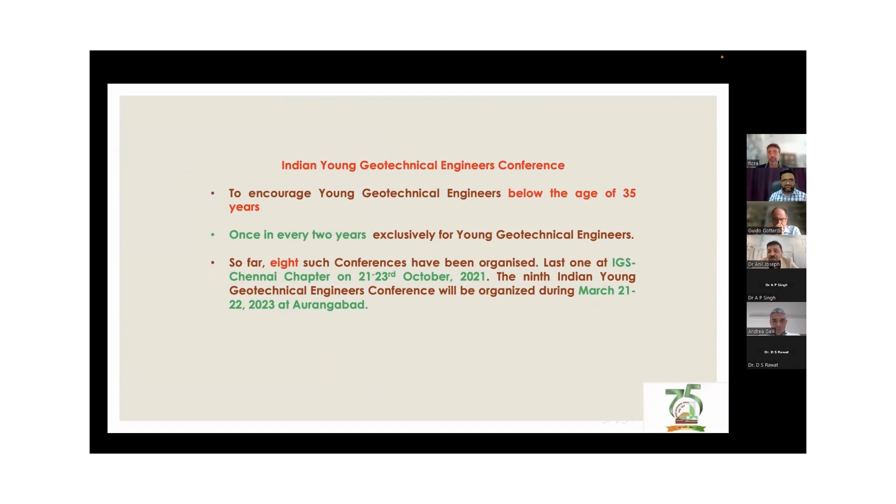These are the objectives, which I don't want to go into, but we promote conferences, seminars, symposia, workshops, webinars, and annual general meetings, and also give the best local chapter award. We also insist on promoting a lot of young geotechnical engineers, people below 35 years of age, because we believe the future is in them, and they are going to make the difference.

We also have a journal, the Indian Geotechnical Journal, now in its 52nd year, and also the IGS newsletter, published quarterly. A lot of awards are given to promote engineers: 37 best paper awards and 15 best papers for young engineers. A lot of industry awards are also given to bring industry and academia close together, so that it improves the interaction, which is very much essential, especially in the case of heritage structures.

And we have a vibrant web portal, and you can go in, and all these lectures will also be uploaded into our web portal as well, so that people can get more knowledge. We also give students practice software programs so that they can improve upon them. India is quite active in this.

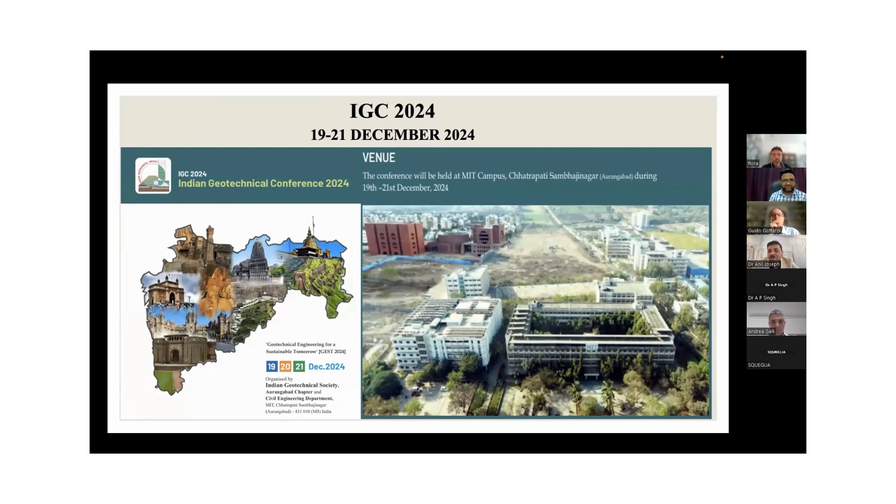I just wanted to mention 2 major events coming up for us, 3 events in fact. From 19 to 21 December 2024, we have the Indian Geotechnical Conference coming at Aurangabad. I look forward to people joining that. These are the important dates for that.

And we have the first GeotechAsia coming up at Taj Exotica, Goa. I want Alessandro Flora and Professor Guido to join us in this mega conference, which is similar to the Asian Regional Conference, promoted by India. It will be in the beautiful tourist city of India called Goa. So definitely look forward to meeting you people. It's in collaboration with IIT Bombay.

And also we have the 12th ISSMGE field monitoring in geomechanics conference coming up in 2026, which will be held at IIT Indore, organized by Professor Nilima Satyam, who is very active in our society.

So we have tie-ups with other societies. We keep on networking and have made tie-ups with many companies and many countries like United States of America, Brazil, Nepal, Sri Lanka, Japan, Korea, and other countries.

So this is all from me regarding the Indian Geotechnical Society. I would like to once again congratulate the organizers for coming up with this, and look forward to listening to Professor Guido regarding the preservation of historical towers. And over to you.

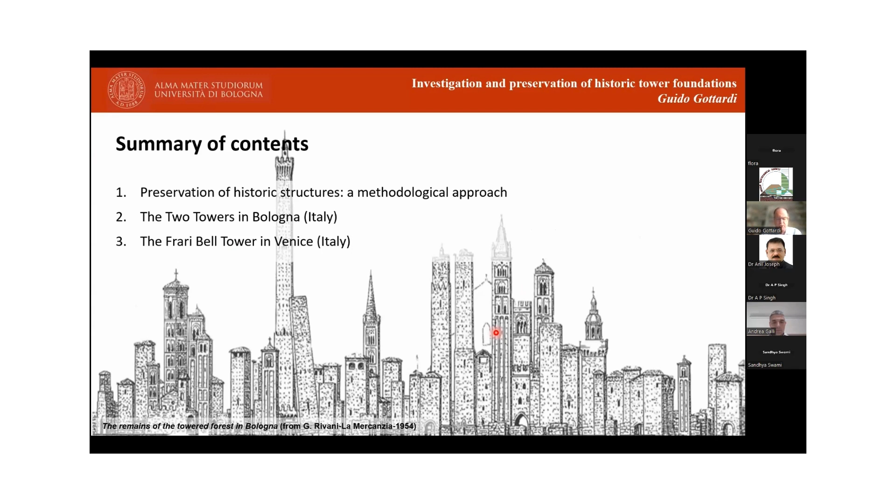I will then try to demonstrate these principles by showing a couple of well-documented case histories in which I happen to be involved. They are located in two Italian cities, Bologna and Venice, where I had the fortune to grow up and live. Both cities are well known for the past presence of a very high number of towers, mainly civic towers in Bologna and bell towers in Venice.

Our technical committee knows very well that for such a complex topic, it is not possible to provide prescriptions of general validity. But the TC rather aims at collecting a number of instructive examples that could be used as a source of inspiration for geotechnical engineers. So really a sort of methodological approach.

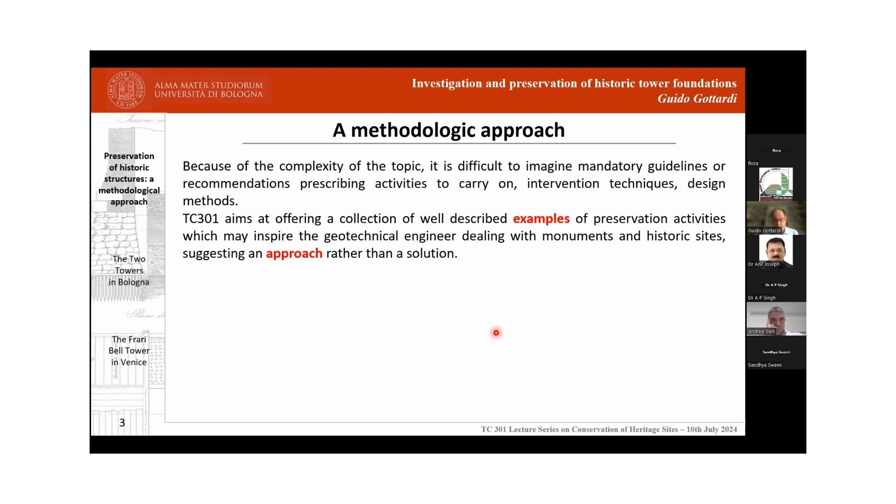And this is exactly what I mean to do here with you today. Now, I am sure we are all aware of the international guidelines on existing structures and their Annex I that points out the importance of preserving authenticity and integrity of heritage structures, in particular of foundations, that are not different from the rest of the structure as character-defining elements.

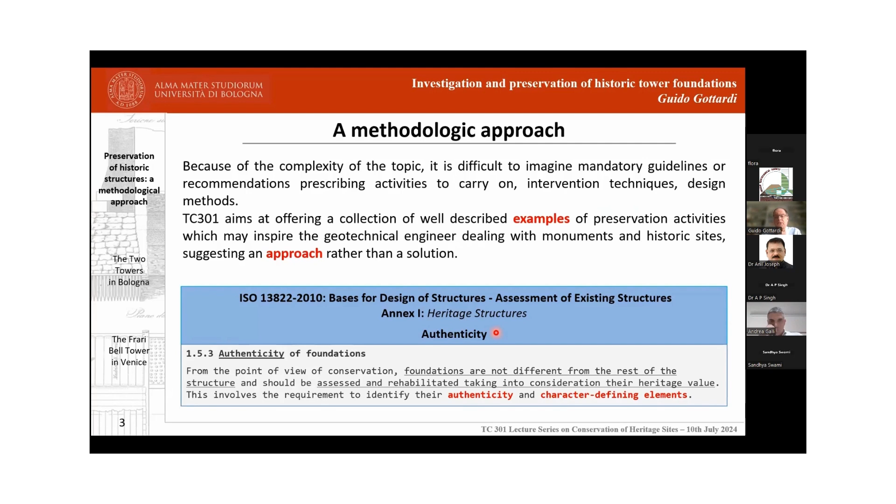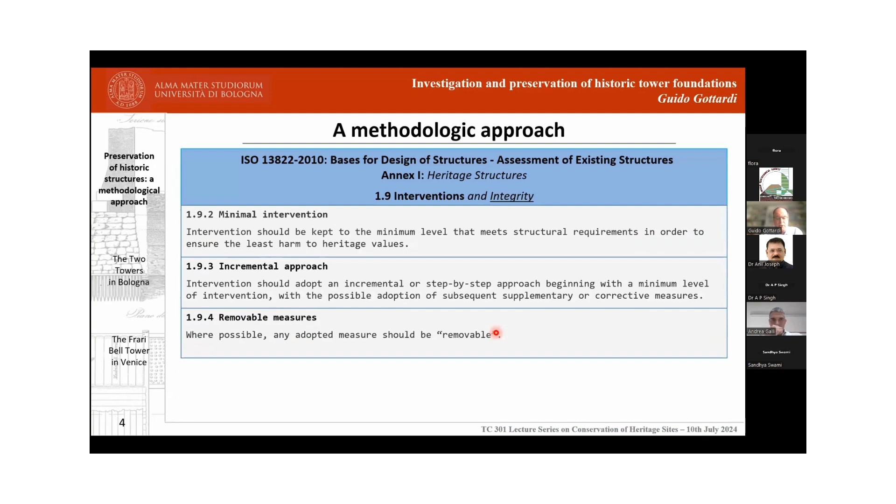And when dealing with possible interventions and remedial measures, preserving integrity requires minimal intervention, an incremental approach, and possibly removable measures.

Now, we all know how the concept of preservation and even the definition of authenticity can be seen and interpreted in different ways around the world according to different cultural contexts. And I believe that one of the main tasks of our TC is exactly to offer a forum of discussion and debate to our geotechnical community on all such critical issues.

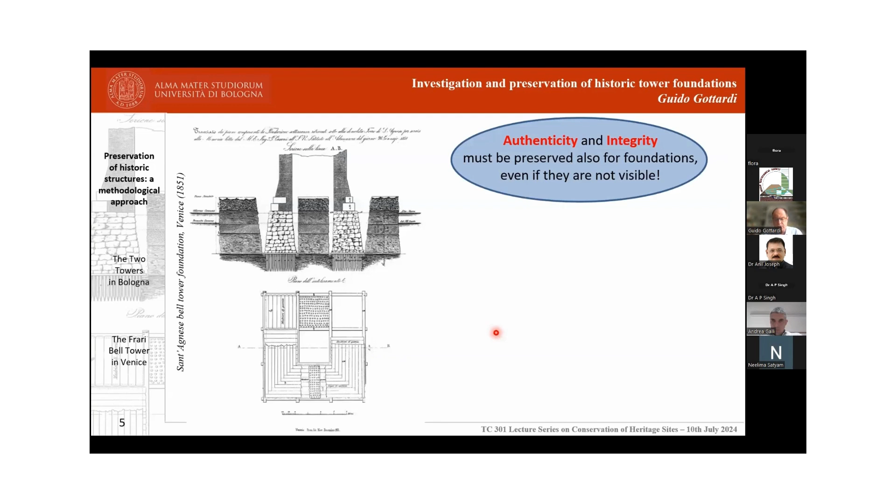Now, no doubt, preservation is an interdisciplinary activity, as already mentioned, and requires the contribution and competencies of many experts who should refer to and talk to each other. Among these, geotechnical engineers must also play a decisive role, I think, even if this is not always the case. It is self-evident that, even if they are not visible, foundations and the supporting soil are parts of a unique, comprehensive system for which authenticity and integrity must be preserved.

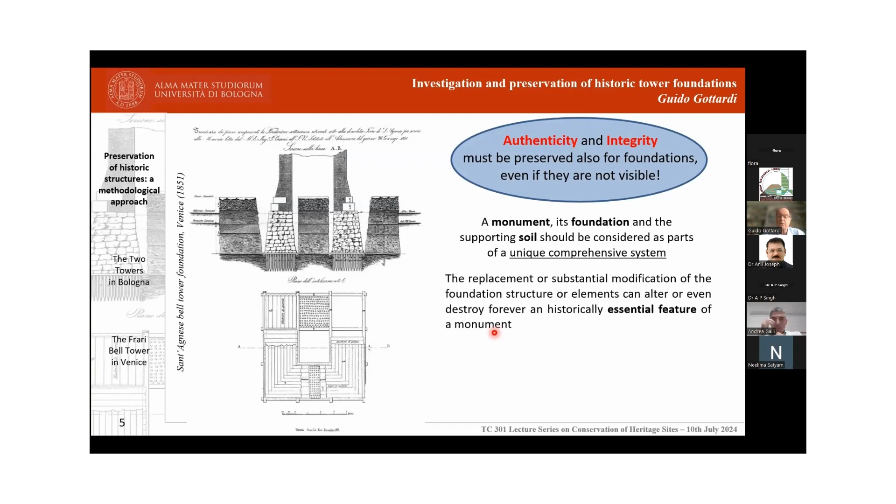The replacement of or substantial modification of the foundation structure or elements can alter or even destroy forever an historically essential feature of a monument. And towers in particular, I think, are structures whose behavior mainly relies on their interaction with soil, and therefore the solution to their possible problems could be found exactly there.

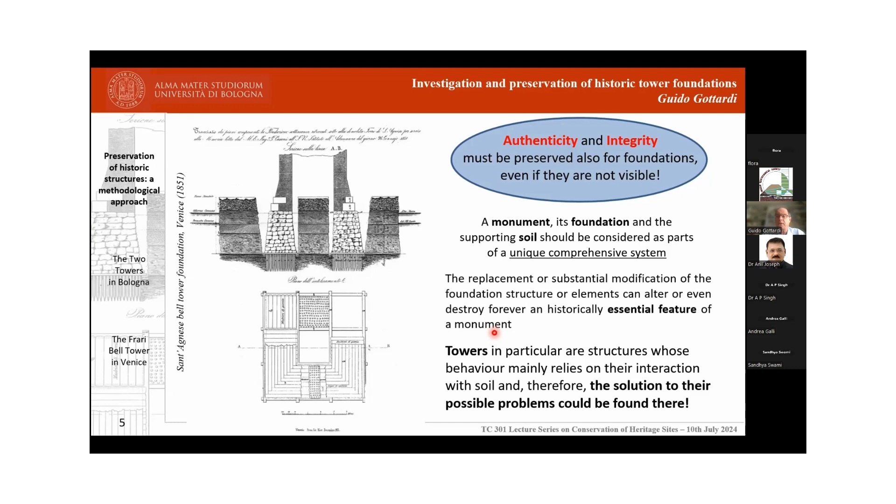Now, talking about towers, I cannot but mention the most famous example of a respectful approach: the soil extraction intervention carried out for the Leaning Tower of Pisa, only after many years of studies and investigations, and having taken into consideration several options, following a careful step-by-step procedure and achieving the final successful result, as our good friend Professor Carlo Viggiani likes to say, without touching it.

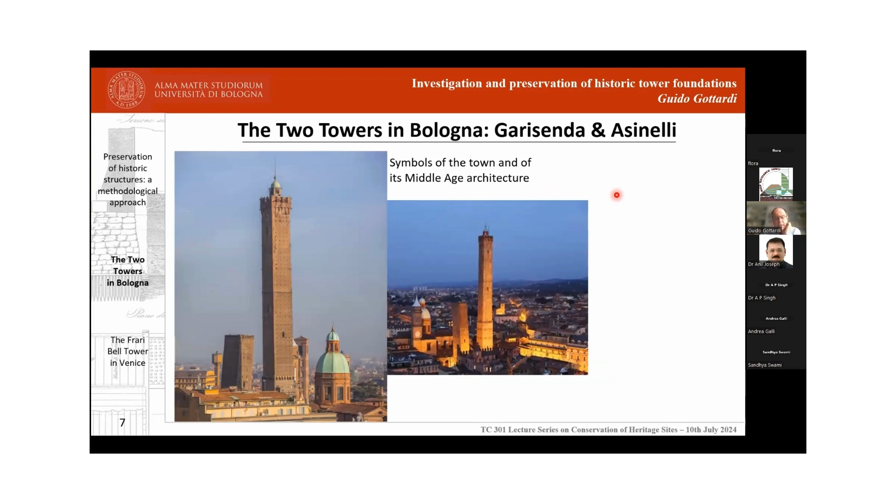Later on, I will present a less known case that followed a very similar approach. But let's start from the two towers in Bologna. Garisenda and Asinelli are the true symbol of the town and of its Middle Age architecture. Located one close to the other, in the very heart of the city center, they are among the few remains of a past when tens of towers used to populate and make characteristic the skyline of Bologna.

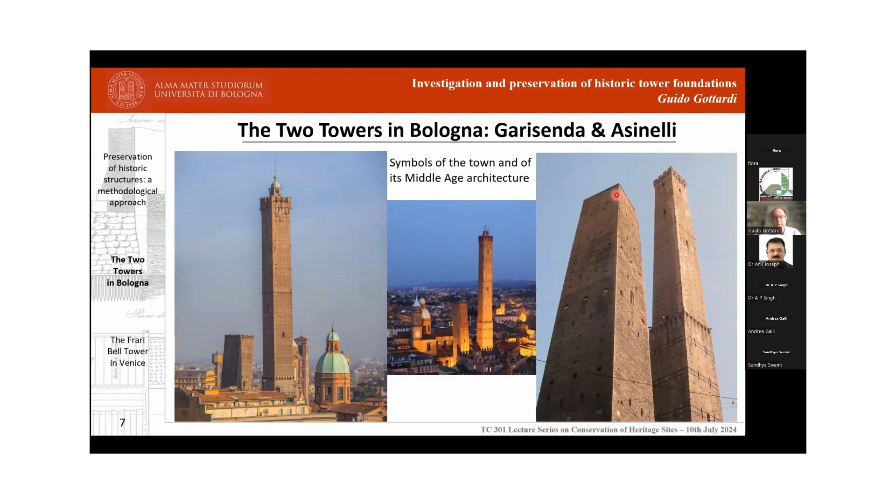Here you can see the main figures of the two towers. Garisenda, the shorter one, was constructed first towards the end of the 11th century with thick rubble masonry walls and a height that was originally 60 meters, but was soon reduced to slightly more than 48, the current height, because of its significant leaning that most probably started soon after its construction.

Its current inclination towards southeast is quite impressive, and this generates an important overturning moment onto its foundations with serious critical implications on its long-term stability. At the right bottom end of the slide, you can see with a black arrow the main direction of the inclination, both of Garisenda and of Asinelli, which is almost opposite to it.

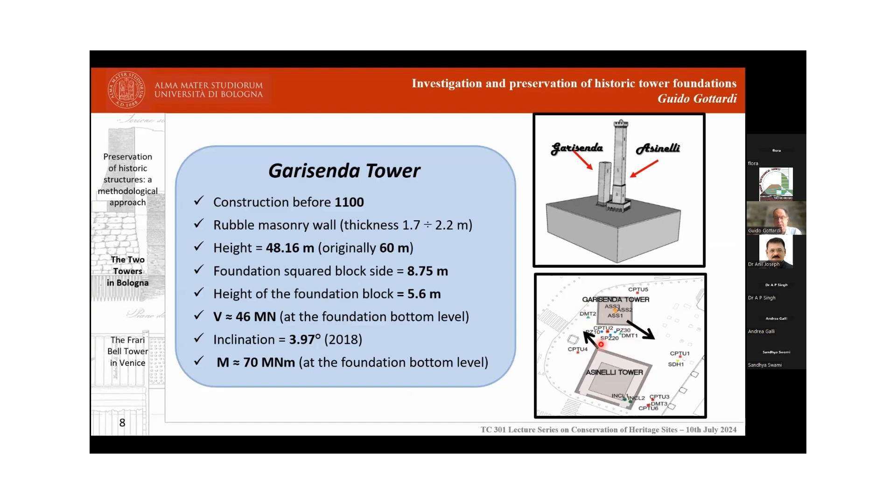Fortunately, the Asinelli has got a much smaller inclination, but it is twice as tall, making it the tallest and most slender original medieval tower in Italy. It was constructed soon after the Garisenda with larger foundations and thicker walls, probably after having learned the relevant lesson from the adjacent Garisenda.

If we look at the historical sequence of events concerning the two towers, one can see that while the Asinelli was raised up to more or less its current height of 100 meters, the Garisenda height was reduced by 12 meters, as mentioned, even though the initial idea, because of its inclination, was to demolish it completely.

The two towers are located right in the city center, so many events occurred over the past centuries, with lots of constructions, craftsmen's workshops, and even a small church built in the area around the towers. All these structures were demolished at the end of the 19th century.

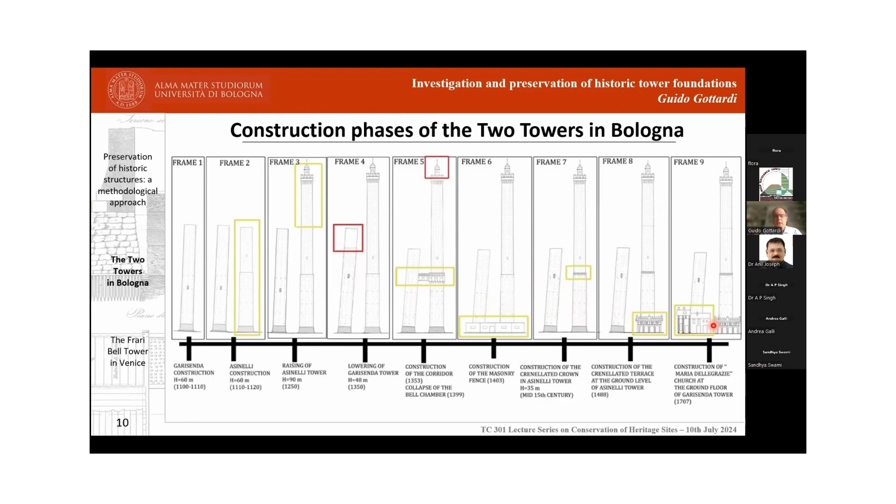It might be interesting to know that the construction method of a medieval tower remained substantially unchanged until the beginning of the last century. The main body of the foundation was essentially made of a conglomerate block cast in place, directly laying on the virgin soil, or sometimes on wooden piles.

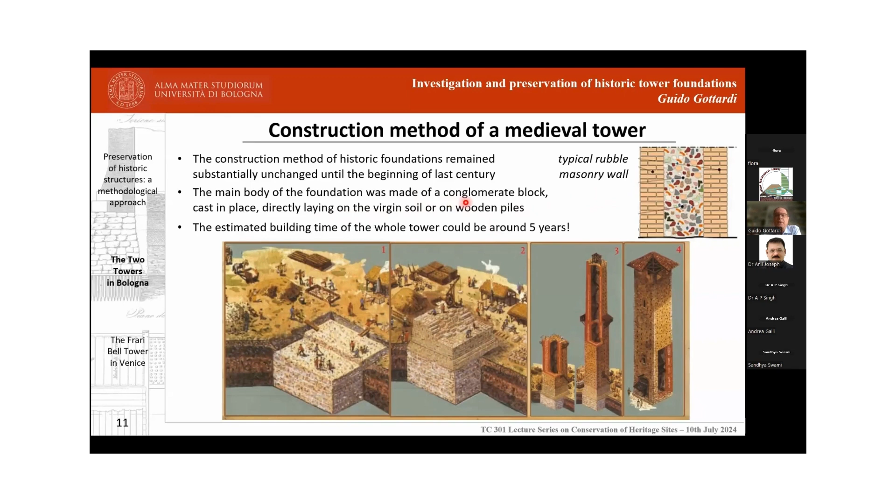The structure of the tower was made of typical rubble masonry walls, with gravel and bricks with lime mortar inside, and an external coating of masonry bricks. The estimated building time for the whole tower could be around 5 years, which I think is quite impressive from the historical documents.

Another aspect to know is the geological setting. The historical center of Bologna is located in the Po Valley at the northern foothills of the Apennines, and its elevated position corresponds to the interfluvial area between the rivers Savena, on the right-hand side, and Reno, on the left-hand side. There are other small rivers and creeks flowing into the city center, and the subsoil of the Bologna city center is mainly alluvial deposits of the Pleistocene era.

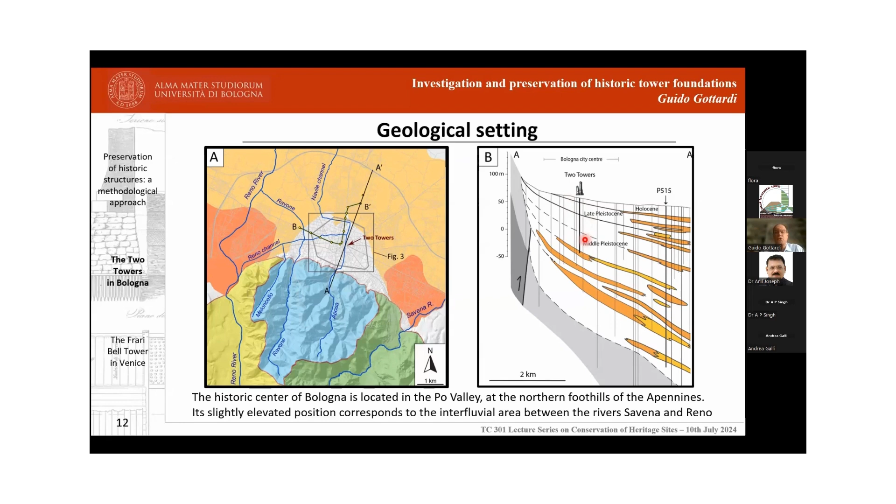As you can see, for about 100 meters below the two towers' position, you have essentially fine-grained soils. This was also found through several geotechnical investigation campaigns carried out over the last decades by the different committees called upon to look after the towers.

The final geotechnical investigation was carried out in 2016, and it was made up of corings, downhole tests, dilatometer tests, and some geotechnical monitoring like piezometers and seismometers. From these investigations, as well as previous ones, an important feature could be reconstructed: how the foundation of the Garisenda Tower is made.

We know very little about these towers from old documents, so we don't even know how they are made, what the material is, or what the geometry is. Starting from the bottom to the top, we find a foundation block made of conglomerate and lime mortar as well, then a basement made of selenite stones.

Selenite is a local gypsum rock much used locally in Bologna for many historic buildings. The basement of the tower is made with external walls in selenite stones, but an internal mixture of lime mortar, river gravel, and shards of bricks, what we call the rubble conglomerate. We can find this also on top of the structure, where instead of selenite stones, you have masonry bricks.

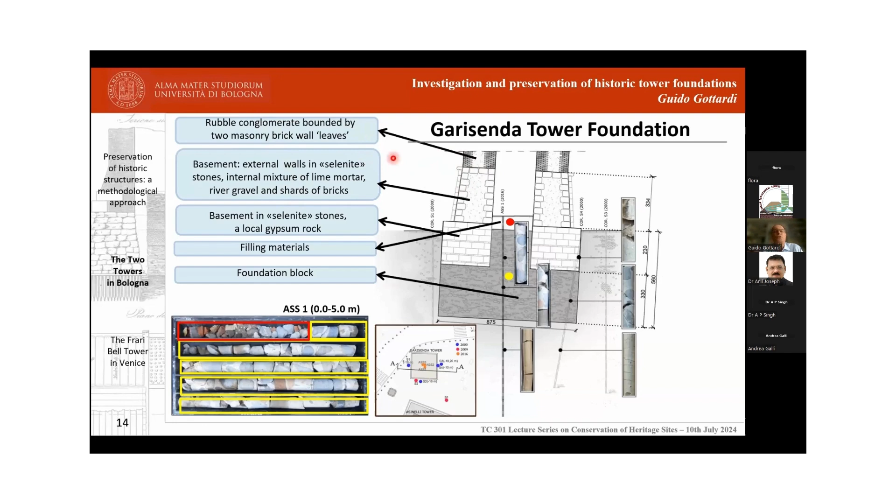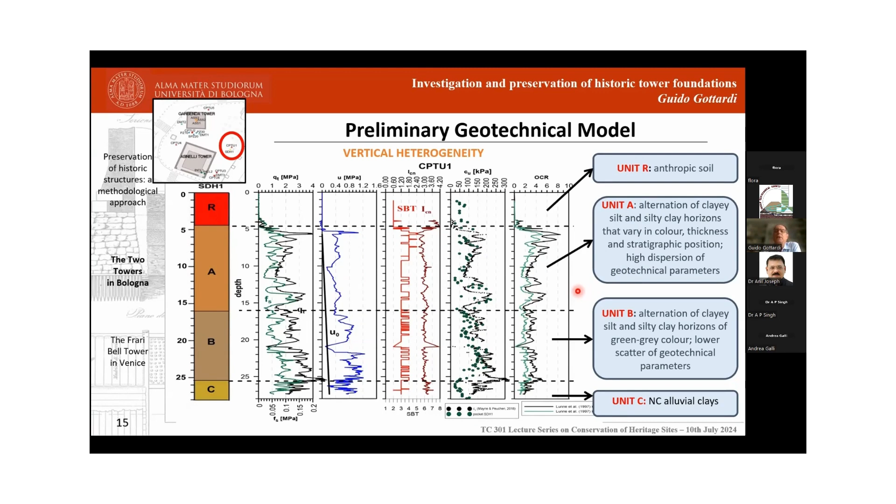In the attempt to get a refined geotechnical model to reduce the uncertainty and dispersion of those parameters, we tried to look into these alluvial deposits, which by their nature show typical lenticular geometries with very poor lateral extent, and are locally interrupted by paleosols.

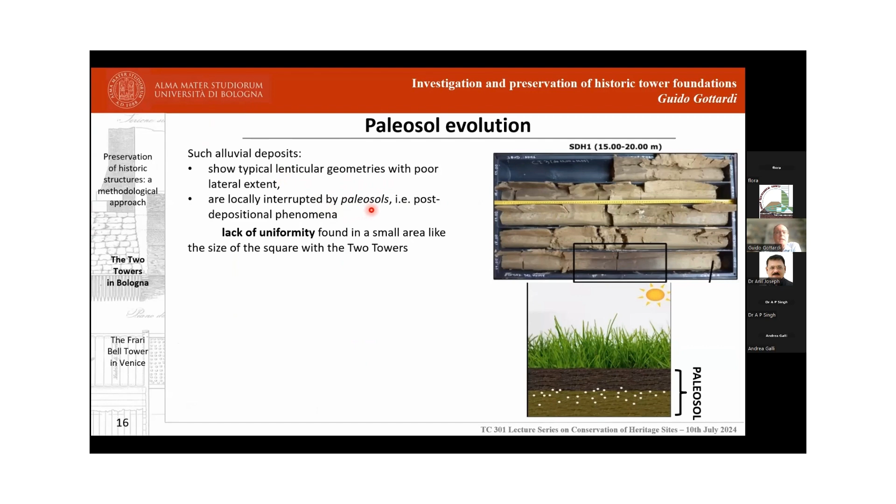What are paleosols? Paleosols are post-depositional phenomena that typically develop during a long period of subaerial exposure of topsoil. So you can find over time this sequence of horizons, Ab, Bk, and Bw, with a different degree of pedogenesis. This is the reason for an important lack of uniformity, both vertically and horizontally, found in a small area, just the size of the square with the two towers.

Now, I won't go into the details of this very articulated model, but we could actually reconstruct the different layers, ascribing them to their history, and so much reducing the uncertainty of their geotechnical parameters. So in this way, also the stratigraphy of the local subsoil could be reconstructed in a very detailed and reliable way.

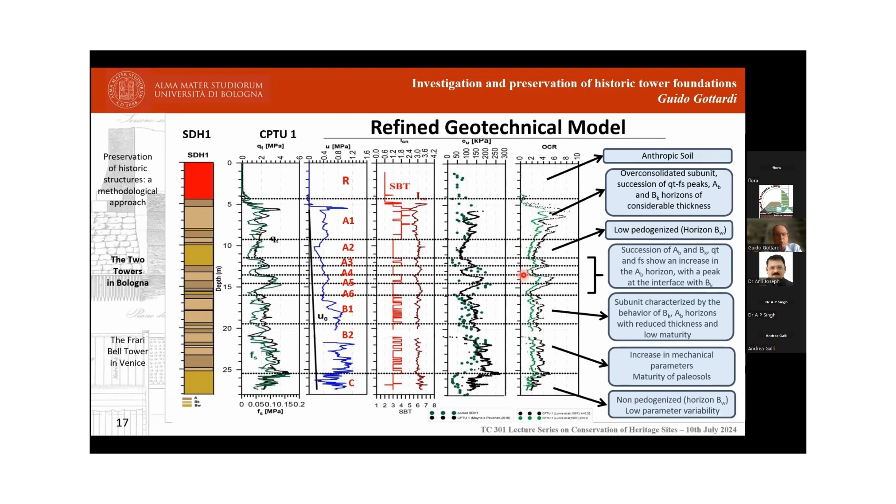That was more or less estimated between 1 meter and 1.5 meters as total settlement of the two towers.

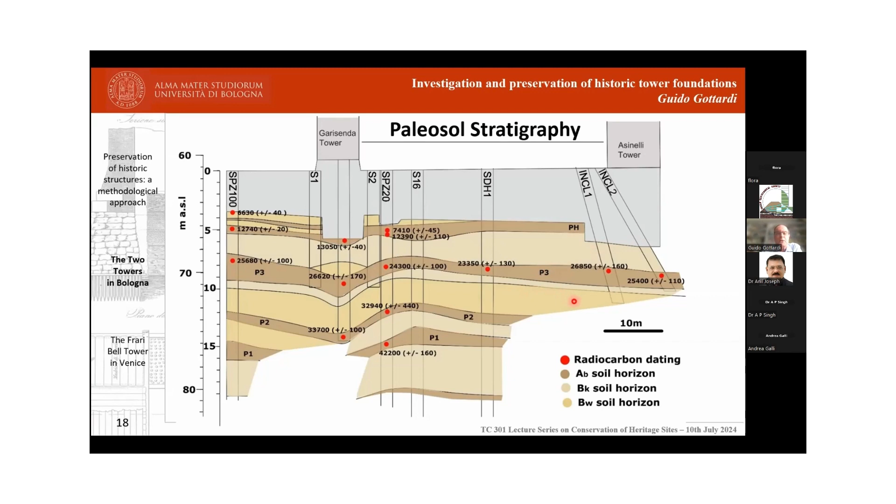Of course, this is only an assumption, difficult to demonstrate, but this is consistent with the fact that the tower started to lean soon after its construction.

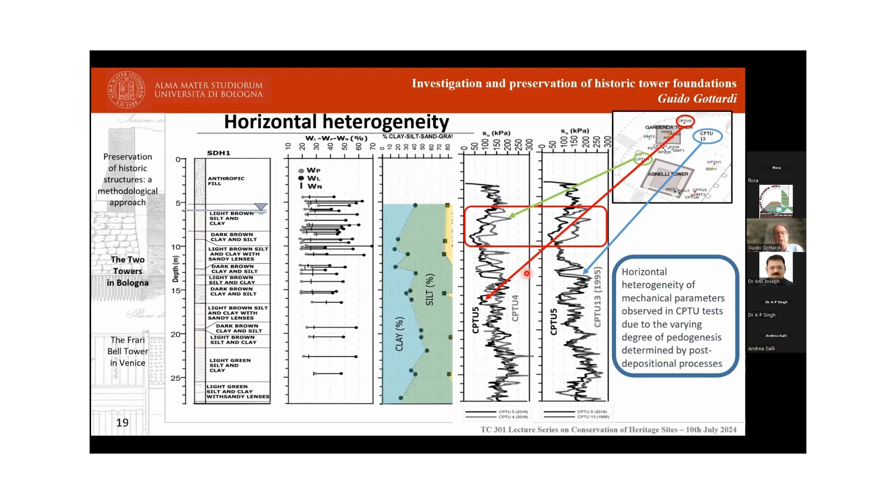So this makes the overall framework of knowledge and understanding of the situation of the foundation and the subsoil below the foundation for the Garisenda, because a refined geotechnical model is required to reliably investigate a possible leaning instability mechanism that we know very well for the much inclined, very leaning towers, that is due to lack of stiffness of the foundation soil, not of the strength of the soil.

And this was the result of the continuous ongoing increase of something which is an already alarmingly large inclination of the tower. However, in this moment, more urgent structural issues arose for the Garisenda and are related to the extremely high stress level, which again, because of its strong high inclination, exists at the southeast corner of its basement, and at the same time to the progressive degradation and the gradual local disintegration of the selenite stones.

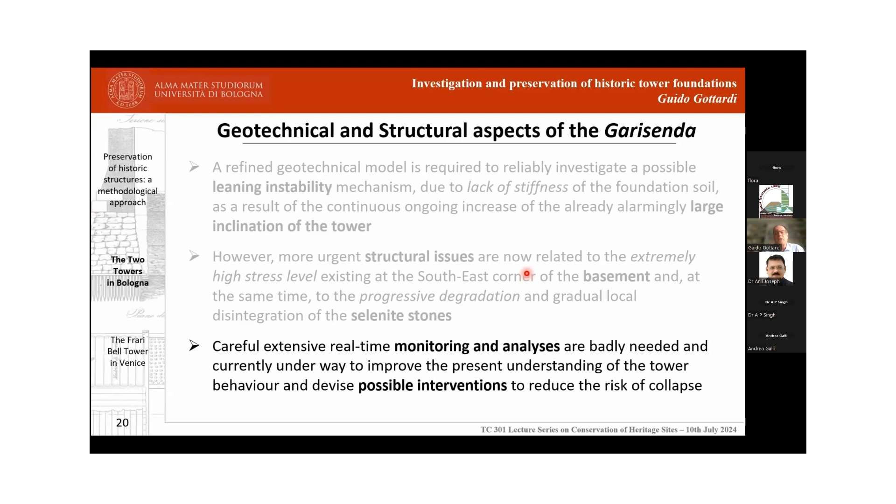So this main concern required, and is still underway, a careful, extensive, real-time monitoring and analysis to improve the present understanding of the tower behavior and devise possible interventions to reduce the risk of collapse.

So I will now show just a few slides on the structural aspects of the Garisenda, starting from the very articulated and extensive monitoring systems that were implemented in the Garisenda over the years.

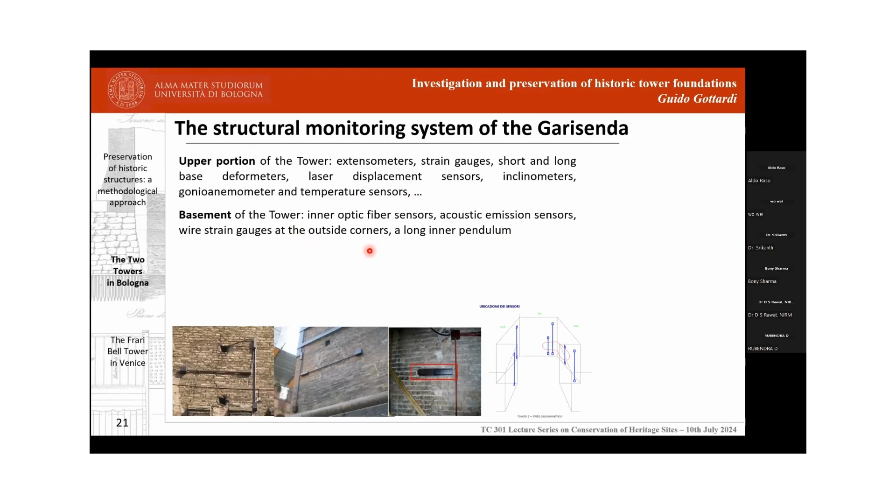So on the upper portion of the tower, extensometers, strain gauges, short and long base deformeters, and so on. In the basement of the tower, more recently, because of the problems detected, inner optic fiber sensors, acoustic emission sensors, wire strain gauges, and a long inner pendulum.

Now, from all this monitoring system, it was quite clear that something, an anomalous local deformation, was occurring at the basement of the tower.

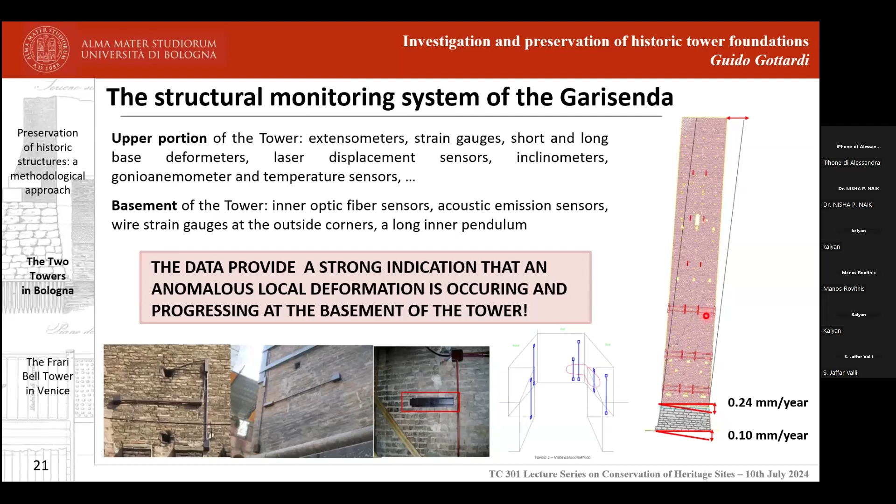You can see that a settlement, a differential settlement of 0.24 millimeter per year, was detected on top of the basement, whereas the foundations showed a differential settlement of much less than that. So the tower is no longer rotating rigidly around its foundations, and this is definitely a critical issue.

Now, an additional complication of the basement is that the outer selenite blocks are covered these days by an additional selenite cladding, which was added at the end of the 19th century.

Remember, after the demolition of all the shops and churches which had been built around the tower, mainly for aesthetical reasons, this is what we call the bugnato. Now, this, of course, prevents us from checking the state of preservation of the outer selenite blocks. And so this is a lack of knowledge these days, which is very, very important.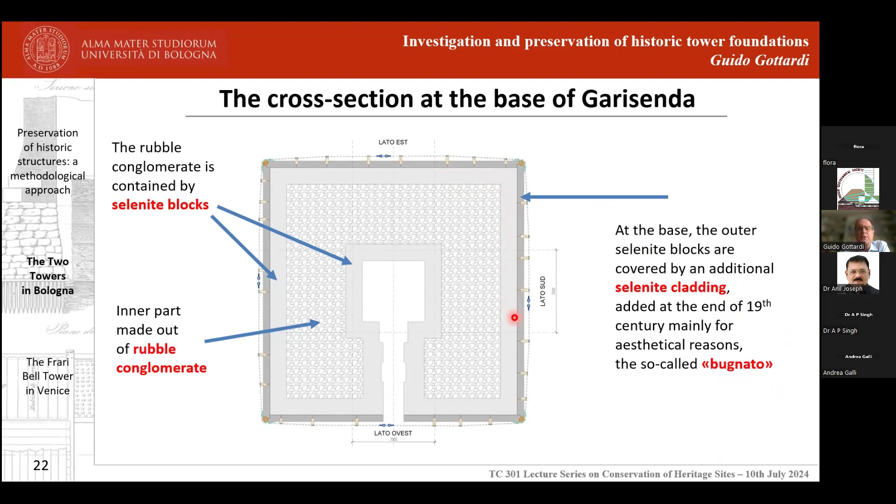And exactly on that corner, you have this area where the selenite blocks were seriously altered because of exposition to very high temperature in the past, because of reported fires, very important fires in the 14th and in the 17th centuries, and also possibly to the presence of forges that are reported in historical documents until the 19th century.

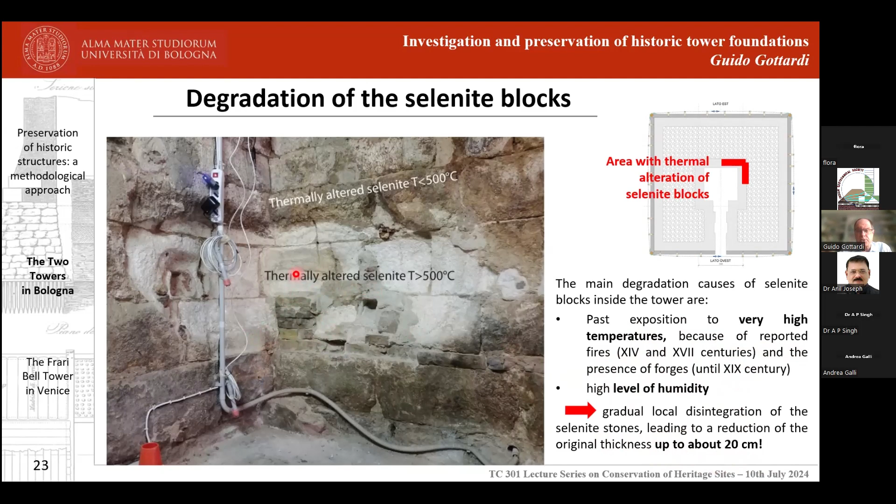Together with a current high level of humidity, this leads to a gradual local disintegration of the selenite stones, which has now reached a reduction of the original thickness up to about 20 centimeters, exactly in the angle where the stress level is highest. This was also confirmed by the fact that the cladding was bowing outside, and this was also detected by laser scanning.

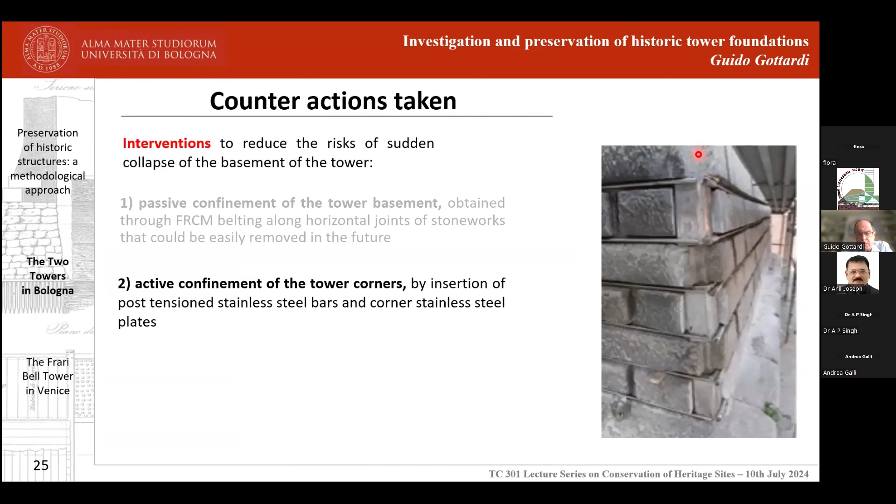This supported the alarming hypothesis that the cladding had started to contribute to the tower statics, and it was prone to local instability. So what the committee decided to do as a counteraction was first to reduce the risks of sudden collapse of the basement of the tower, introducing a passive confinement of the tower basement, an active confinement of the tower corners, and an active confinement of the cladding, all interventions which were already carried out.

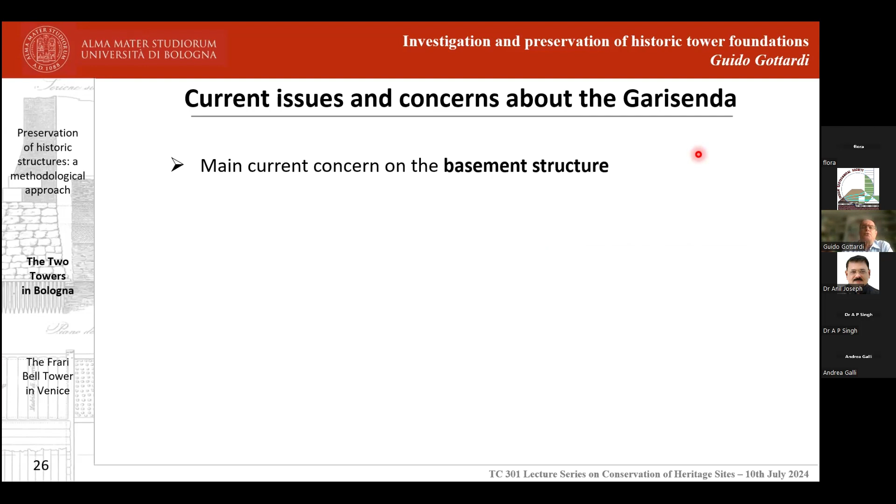Still, these interventions did not reveal fully successful, and the current concern, as I said, is on the basement structure of the Garisenda. There is great uncertainty because of the uncertainties on the materials and on the preservation of such materials, there is a great uncertainty on the actual safety margins of the towers.

The critical situation, the existence of a critical situation, however, is well established, and it is kept under constant monitoring with a real-time system. Due to their position in the city center and to the very high exposition, however, there are unacceptable risks for these reasons, and safety requirements were implemented prior to any further strengthening interventions.

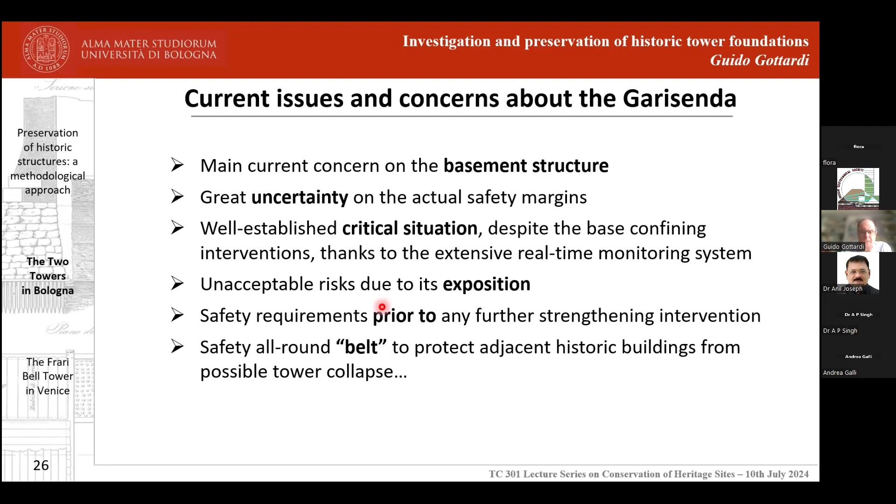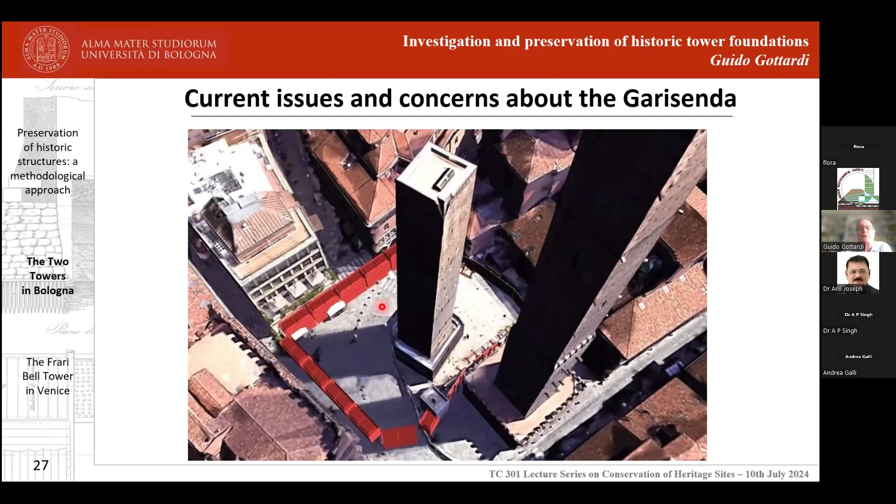The Garisenda story of preservation and strengthening is far from being completed. It's still under investigation, and this will be developed in the next decades. You see how the complex situation requires challenge and innovative solutions, which are not always immediate to find out.

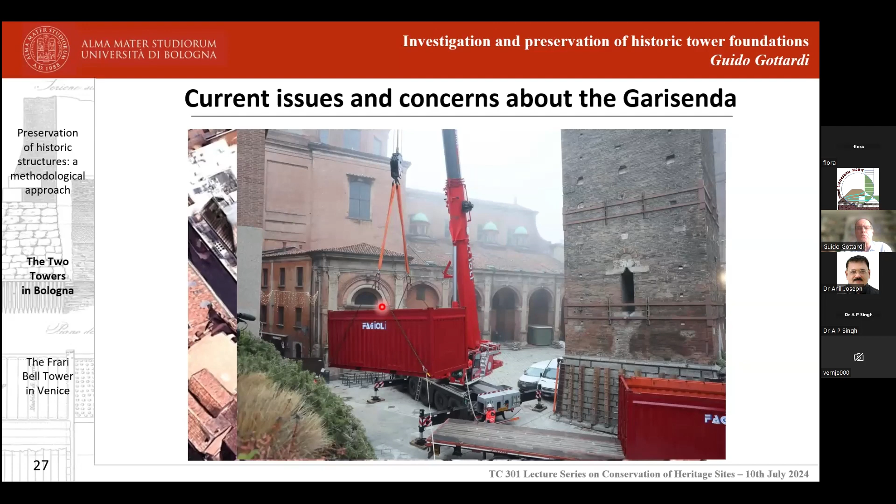In principle, now let's move to the second case history that I want to tell you about, which is concerned with the Basilica of Santa Maria Gloriosa dei Frari in Venice.

And the Basilica, as you can see from this picture, is a classic and most splendid example of Franciscan Gothic style. It looks nowadays exactly as it used to look many centuries ago, as you can see from one of the bird's eye prints that you can find in the historical Venetian documents.

So in Venice, everything is almost, almost more or less the same.

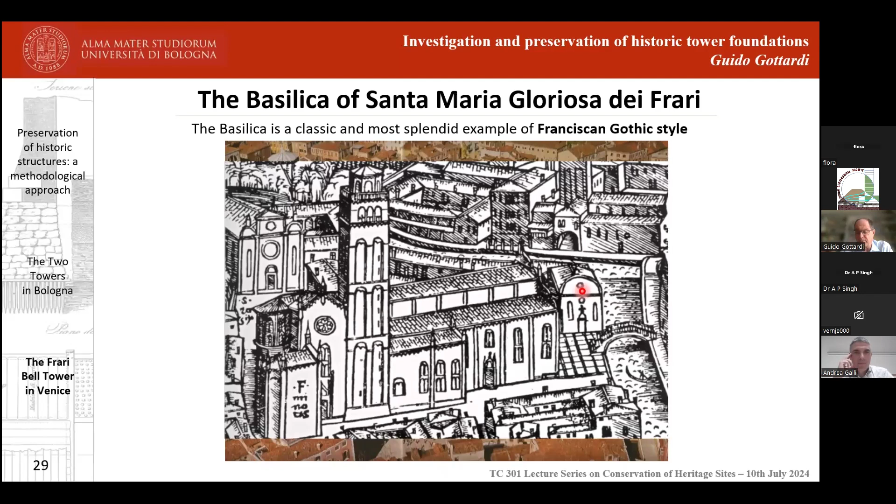Now, I'd like to show you just a picture of the interior, just because of the magnificent interior of the church of the Basilica, which is more than 100 meters long.

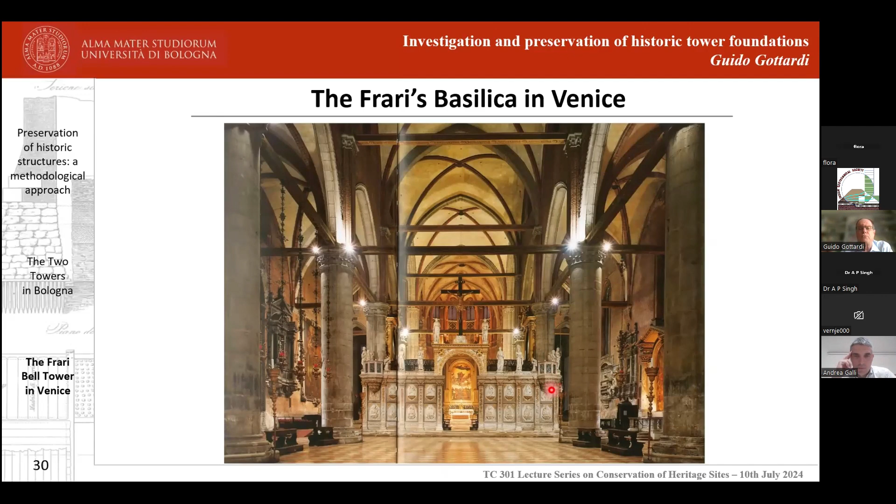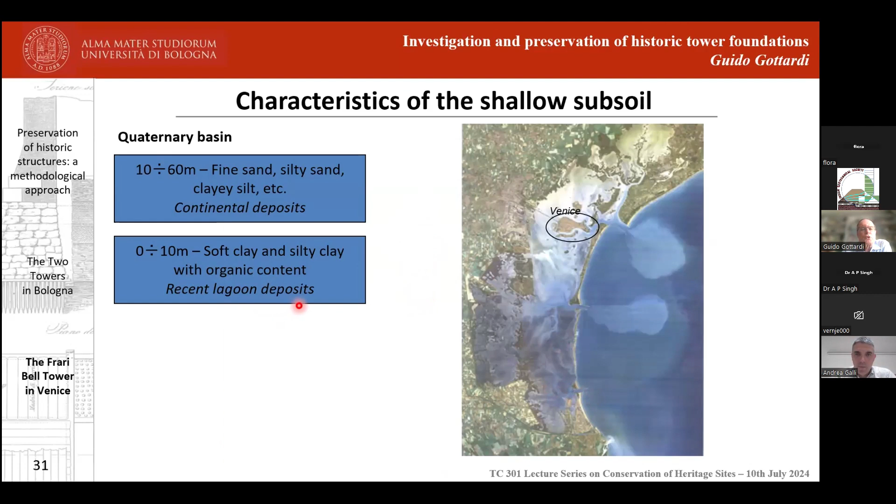But now let's move to the Venetian subsoil, which is mainly made of alluvial deposits of the Quaternary Basin, and the first 10 meters are recent lagoon deposits made up of soft clay and silty clay with organic content, shells, everything inside. And as you can see, this layer, which supports most of the historic foundations in Venice, is quite weak, with an undrained shear strength around 30-40 kPa.

So quite a challenge for the ancient Venetian engineers when you have to build very heavy buildings like bell towers. Now you can see the reconstruction of the bell tower foundation of San Marco, which is made from top to bottom of Istrian limestone blocks, then a quite heavy and thick wooden boarding, and then short but very efficient compaction piles driven into that soft silty clay layer.

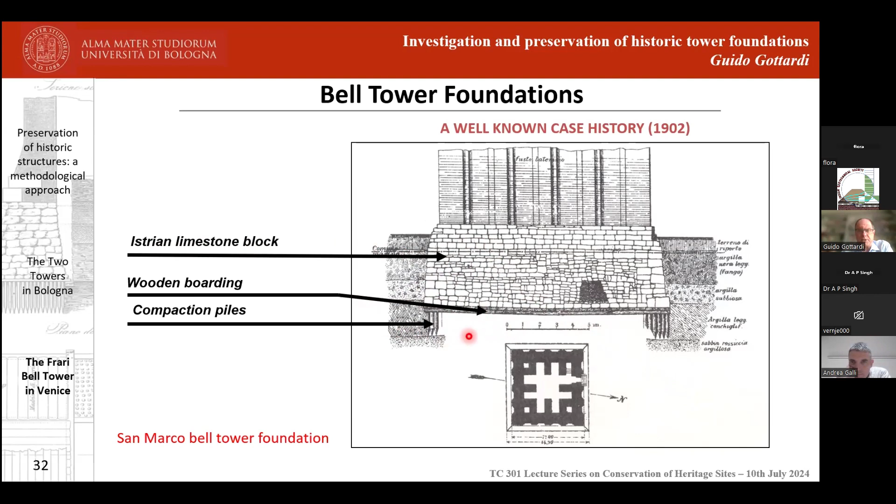Now, how do we know about this perfect geometry of the San Marco bell tower? Because the San Marco bell tower in 1902 suddenly collapsed and fell down. This is quite a well-known case history. The San Marco bell tower was then reconstructed soon after, exactly as it was and where it was.

So beware if you go to Venice and visit San Marco Square - the San Marco bell tower is a sort of a fake. It's probably one of the only fakes in Venice. It dates only 100 years. But anyway, before reconstructing it, it was possible to check its foundations and understand how they were built at the time.

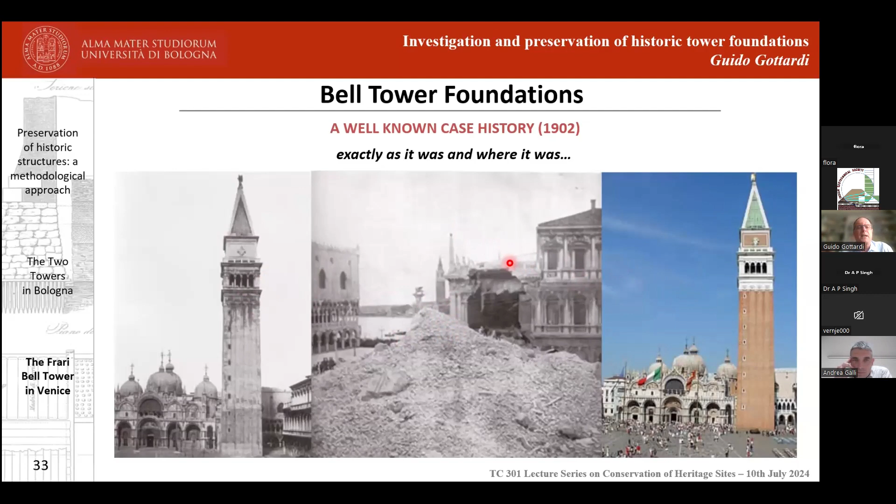Now, after the collapse of the San Marco bell tower, all the other bell towers in Venice, but I would say all the other towers in Italy, were subjected to a careful inspection, and especially the Frari bell tower, which is the second tallest bell tower in Venice.

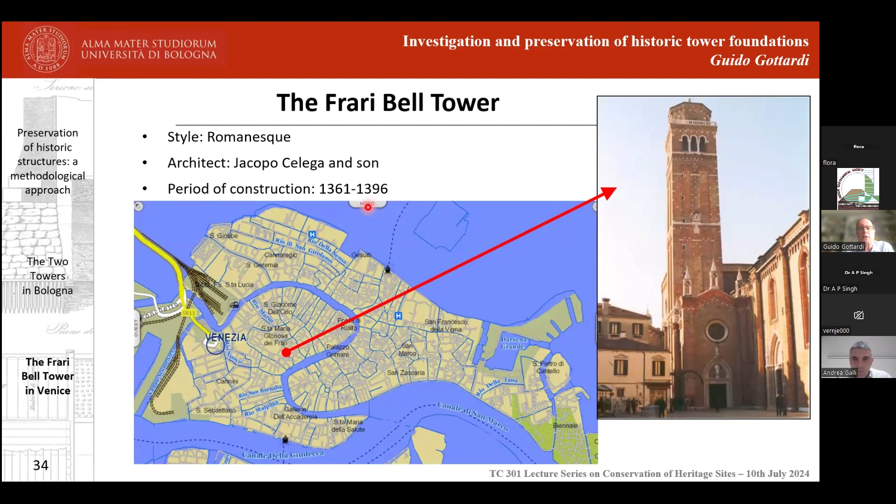Constructed in the second part of the 14th century in Romanesque style, it's quite an interesting story that a smaller primitive church was built in 1225 by the Friars Minor, and the bell tower was designed, as all bell towers at the time, as a separate independent structure, because bell towers are heavier and subjected to greater settlements with respect to the nearby church. But due to the growing demand, works soon started again on its much larger replacement, which is what you can see in this old picture, but also you can see today.

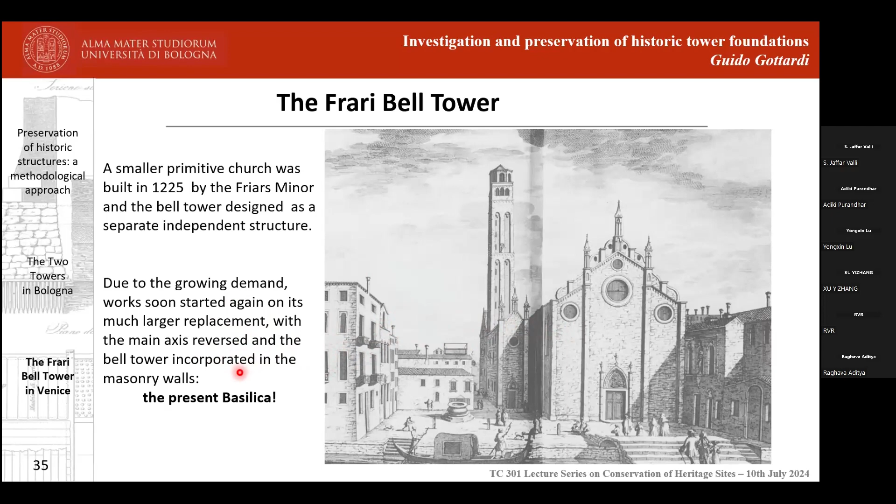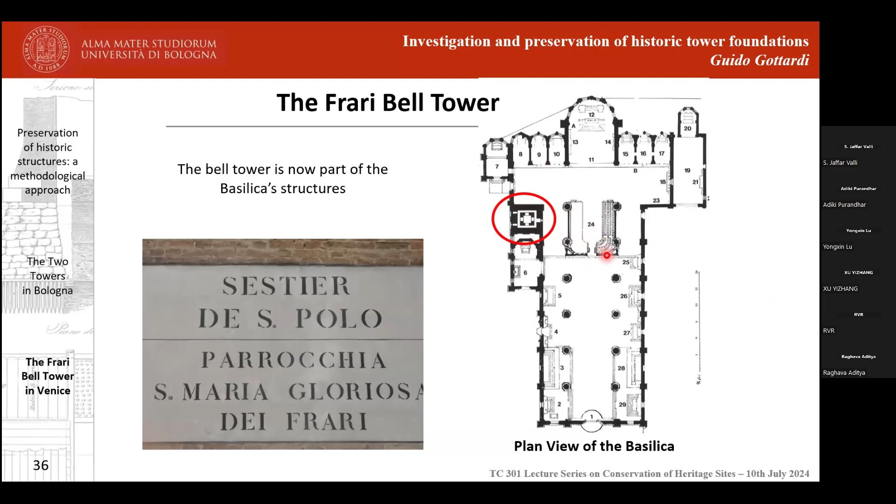The present basilica has got the main axis reversed and incorporated the bell tower in the masonry walls. If you look at the plan view of the basilica, you can see here circled in red that the bell tower is now part of the basilica structure. And this, of course, over the centuries provided several problems because of differential settlements.

Now let's have a look at the tower, which is a double brick masonry structure. The height is 65 meters and the base width is between 9.2 and 9.4 meters. The weight is about 57 meganewtons, with a moment which is not as large as what we have seen for the leaning towers in Bologna. In fact, the inclination is not that much concern. The main concern here is not the high inclination, but the interaction with the basilica structure.

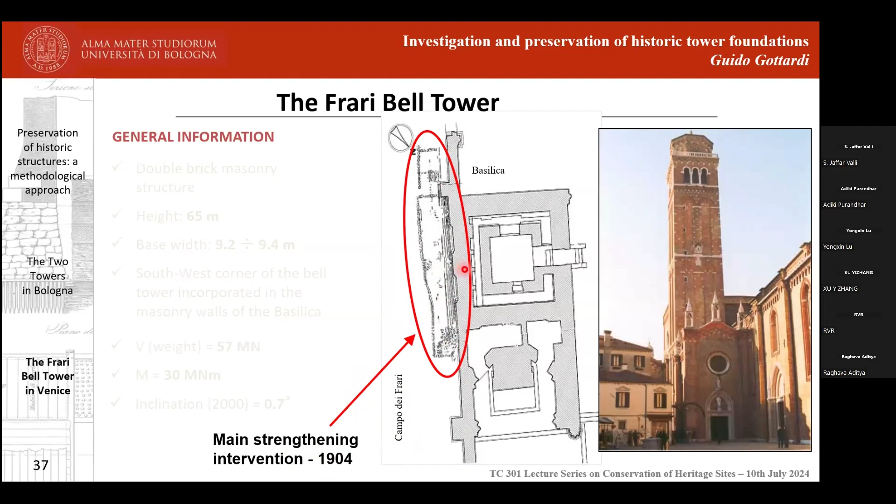Especially because after the San Marco bell tower collapse in 1902, a main strengthening intervention, enlarging the foundations, was carried out only on this side, on the leaning side of this bell tower. Now, this asymmetry led to problems of interaction between the tower and the church and the basilica.

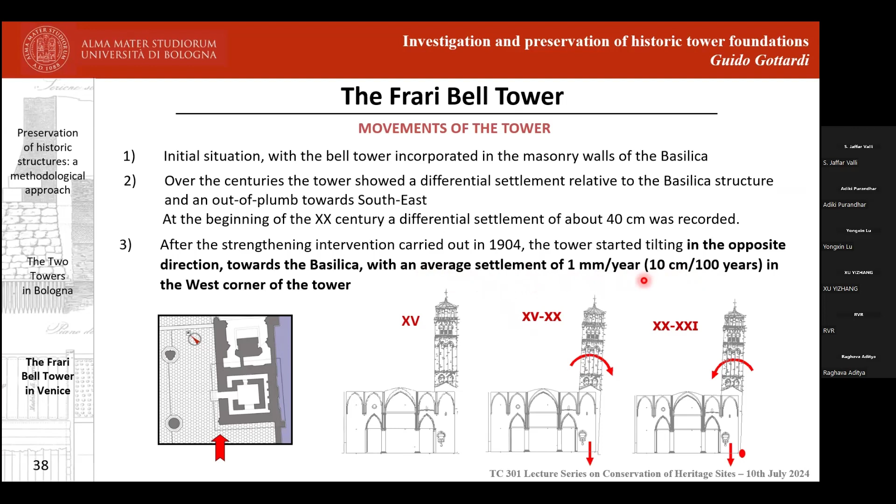If we start from the initial situation with the bell tower incorporated in the masonry walls of the basilica, over the centuries, the tower showed a differential settlement relative to the basilica, and this produced an out of plumb towards southeast. Now, at the beginning of the 20th century, differential settlements of about 40 centimeters were recorded. But after the intervention in 1904, the tower started tilting in the opposite direction towards the basilica because of the intervention here at the bottom side, which I am highlighting right now. And still there is an average settlement of 1 millimeter per year, 10 centimeters in 100 years, which is quite relevant after so long.

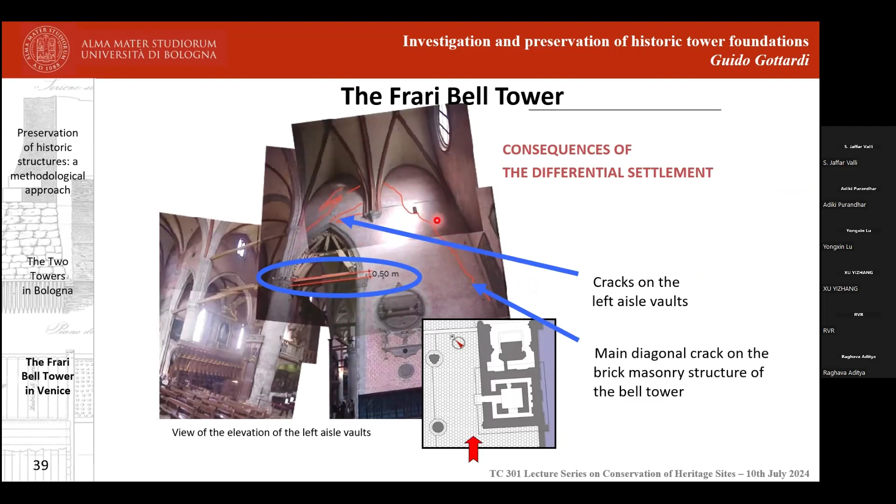Now, what are the consequences of such differential settlements? You can see if the structures are connected. You can see here in the arch inside the basilica, the cracks on the left aisle vaults, but this big diagonal crack on the brick masonry structure is now due to the differential settlements. This is due to the fact that the tower is going towards the structure of the basilica. And this, of course, is a great concern for the stability of the structures themselves.

At the time, we carried out flat jack measurements showing the presence of a thrust line on this very slender and delicate column of the basilica, with measured stress levels which were quite close to the resistance, to the strength of the column material.

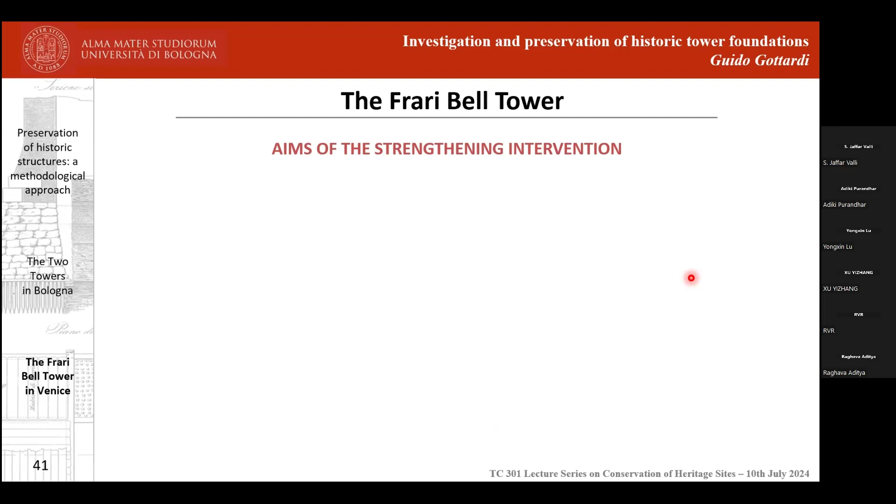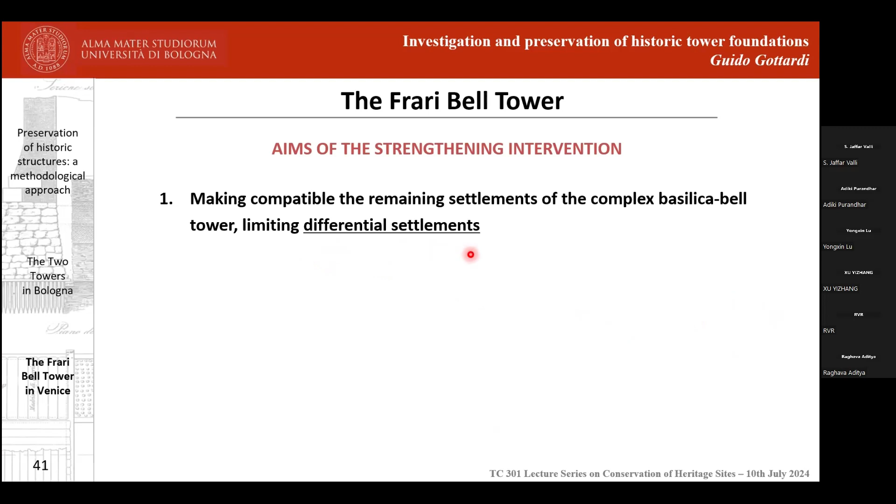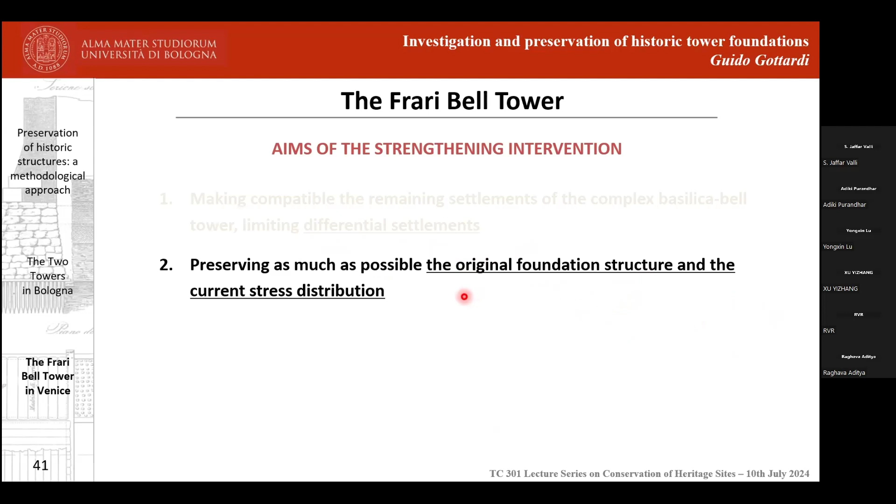So something had to be done to reduce this very harmful interaction. But there were requirements on this intervention, of course, trying not to completely stop the settlements, just limiting the differential settlements between the basilica and the bell tower, preserving as much as possible the original foundation structure, the integrity and authenticity. Now, essentially avoiding proposing a rigid foundation system for the bell tower. In one word, avoiding micropiles to stabilize the tower, and also enabling a flexible and modular intervention according to the outcome of a suitably implemented real-time monitoring.

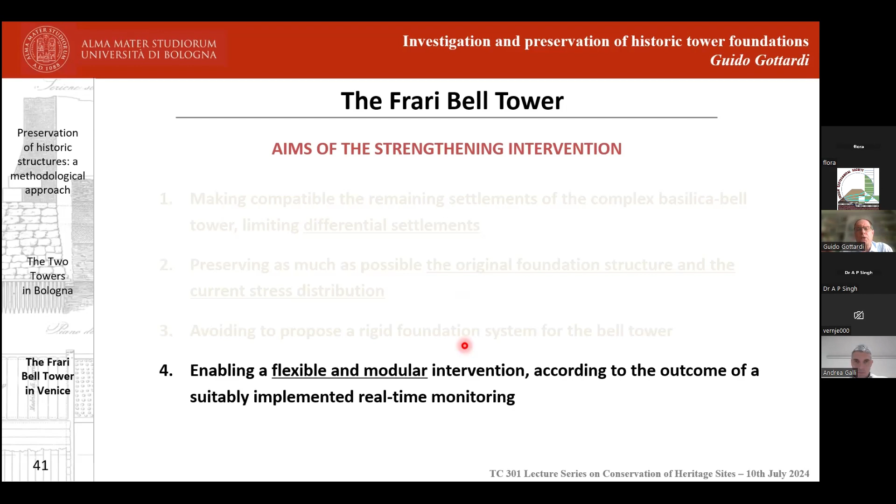So now what we started, of course, from geotechnical investigations that were carried out all around the bell tower and inside it. And these geotechnical investigations were made of boreholes, piezo-cone tests, dilatometer tests at various stages of the intervention.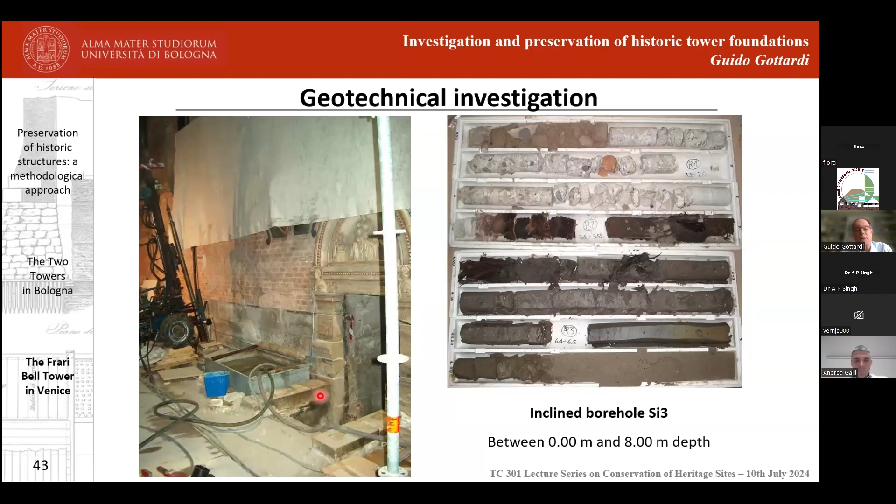You can see the entrance, now the current entrance to the bell tower, which is more than 50 centimeters down with respect to the ground level. So you have to go down a couple of steps to enter into the tower.

So this was the mechanism we had to prevent with intervention. So what was the strategy of the intervention?

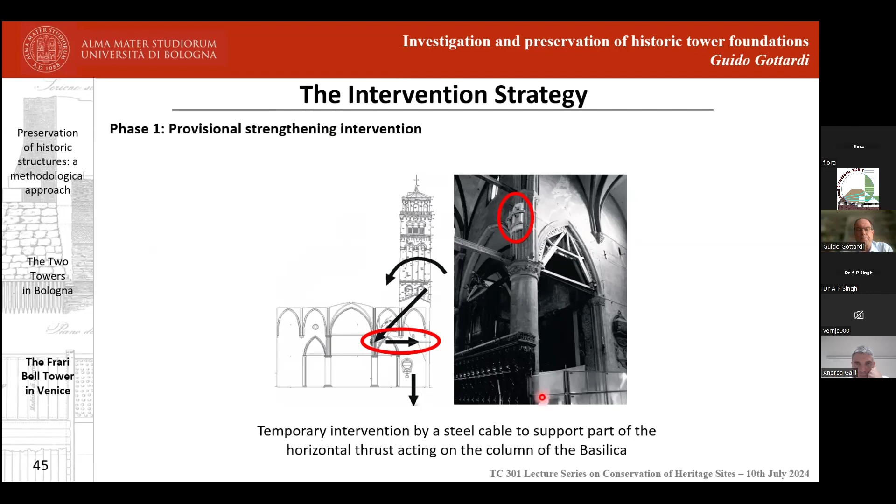First, a provisional strengthening intervention with a steel cable, trying to bear a part of the horizontal thrust.

And then the main intervention was via soil fracturing. Soil fracturing means injecting the soil, producing fractures, and filling them with grout.

In the end, you will build a sort of a belt around the foundation of the tower of improved material, which should prevent the squeezing out of the silty clay here and allow the tower to settle vertically without any interaction with the basilica outside.

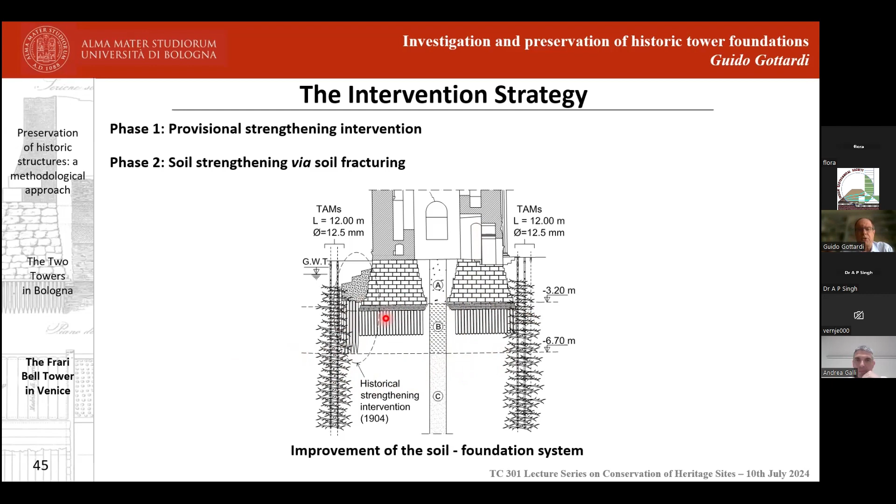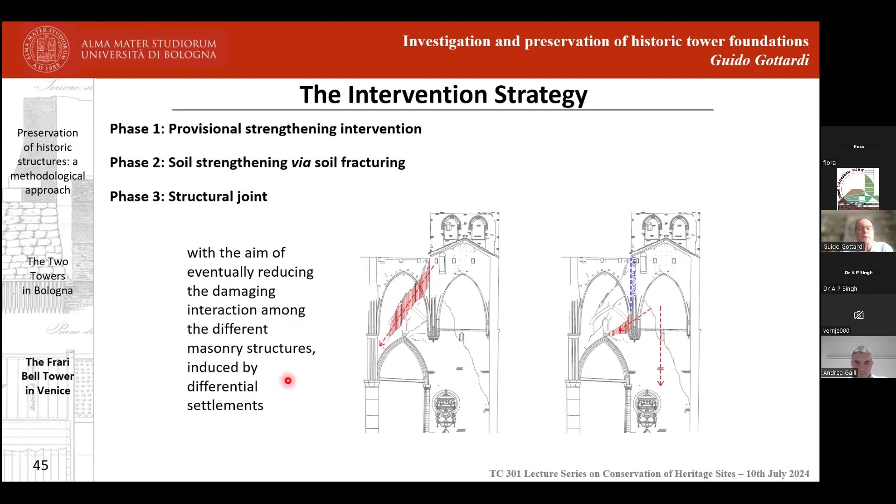So quite an innovative intervention, and once again, without touching the tower foundations, so fully preserving their integrity. At the end, a structural joint could be carried out in order to separate the two structures and reduce the damaging interaction between the different masonry structures.

So the soil fracture intervention was designed all around the foundation, and was preceded by a test site to check the feasibility and the optimization of the injection parameters and the grout properties.

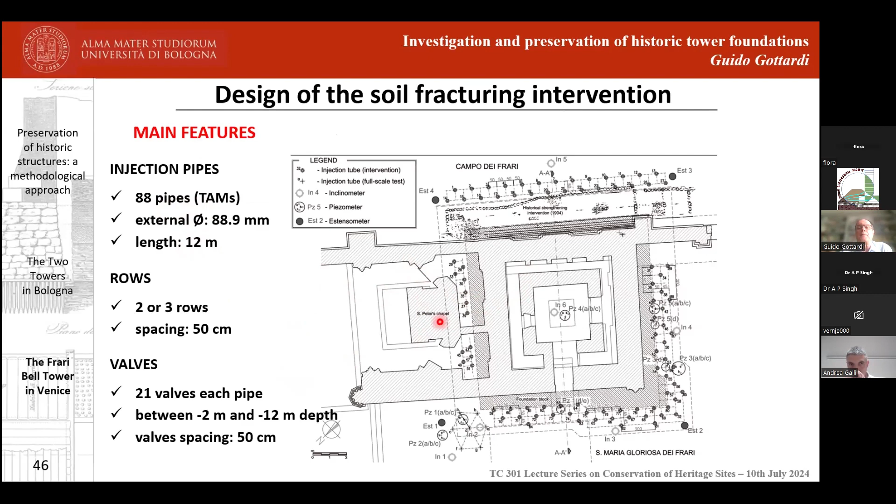Here you can see that 88 pipes were inserted around the tower along 2-3 rows at a spacing of 50 centimeters, and the grout injected from 21 valves spaced at 50 centimeters from each other.

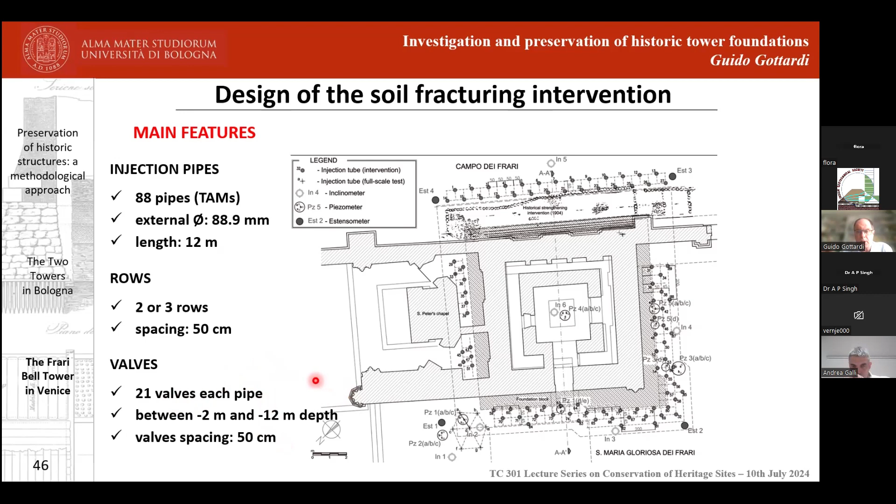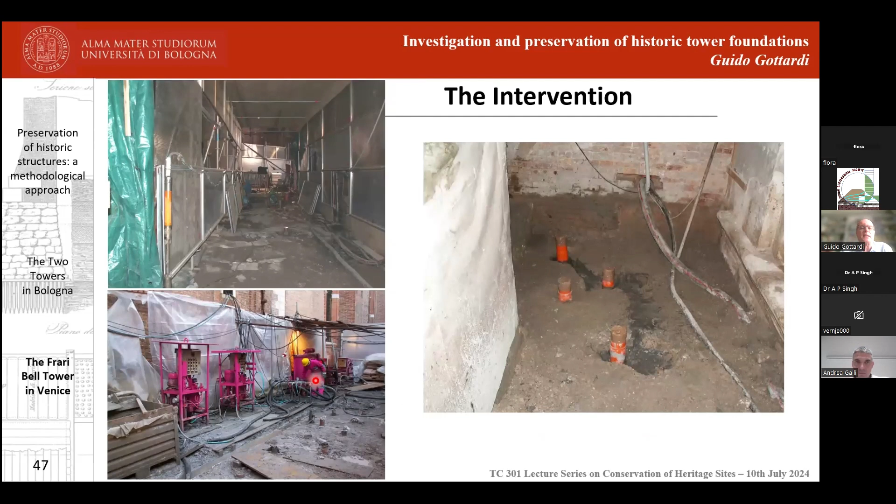These are a couple of pictures of the intervention in a very delicate and difficult to operate environment inside the church.

Now, all the intervention was followed by and kept under constant real-time monitoring of grout injection parameters, of the soil behavior, and of the bell tower. In particular, for the soil behavior, piezometers, extensometers, and inclinometers were carried out around the tower, together with boreholes, piezocone and dilatometer tests, which were carried out at various stages of the intervention.

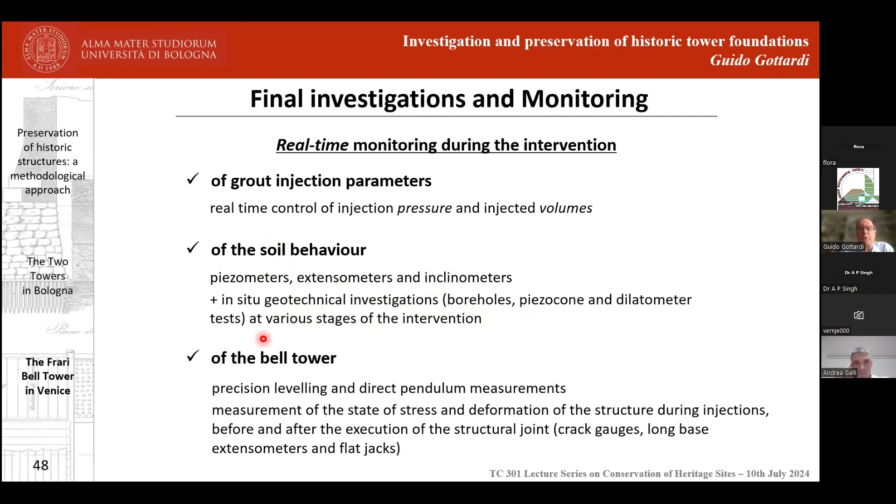So let me just show you a couple of items from this large amount of data. For example, from the piezometry data, all these sudden increases, these spikes, could be recorded, corresponding to the injection phases from the valves near the piezometers.

But what we could see was that immediately after the sudden rise because of the injection, there was a sudden decrease due to the consolidation of the excess pore pressure. And so we could realize that there was a relatively quick consolidation rate of our silty clay. This was quite reassuring for the control of the full intervention.

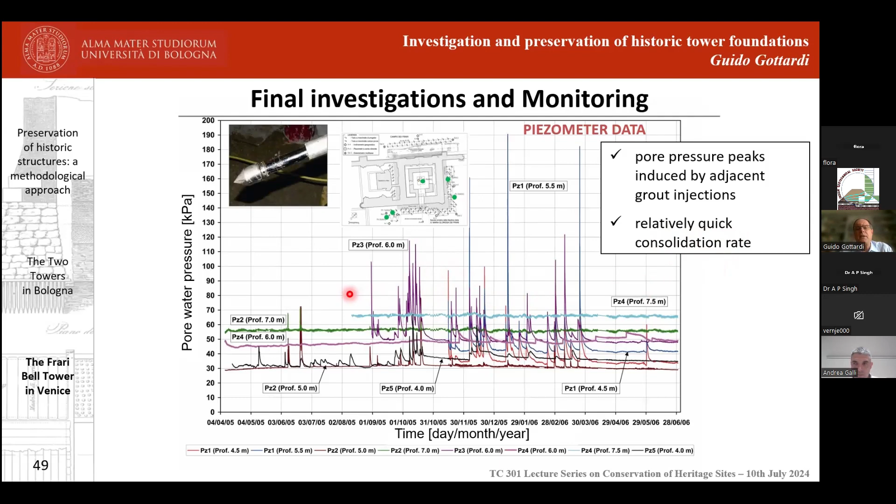Another interesting thing that we found out after the intervention, from the samples extracted, was that we could actually see the lenses of grout that we had injected in several phases. So we could realize that the soil had been fractured and the fracture had been filled with grout.

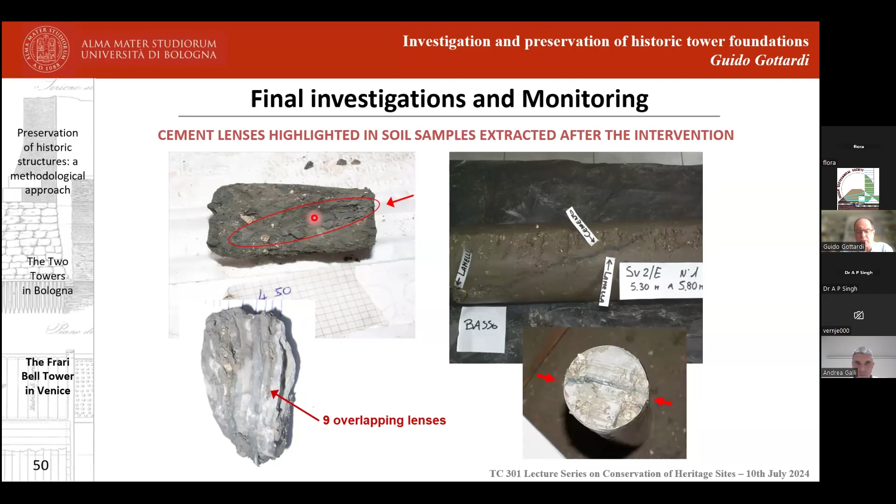Which is not exactly what you could see in the textbooks, but it revealed successful anyway, especially if you compare piezocone and dilatometer tests before and after the intervention.

Now, to complete this presentation, let me show the precision leveling that provided, before the intervention, a differential settlement between the tower here at the bottom left and the column of the basilica of about 1 millimeter per year, as mentioned. During the intervention, this increased to 5 millimeters per year, so quite a big concern.

But after the intervention it proved to be successful because it was reduced to only 0.27 millimeters per year. Now, of course, after the structural joint, the differential settlement increased because of the structural joint, but because of its presence, the interaction was definitely less harmful.

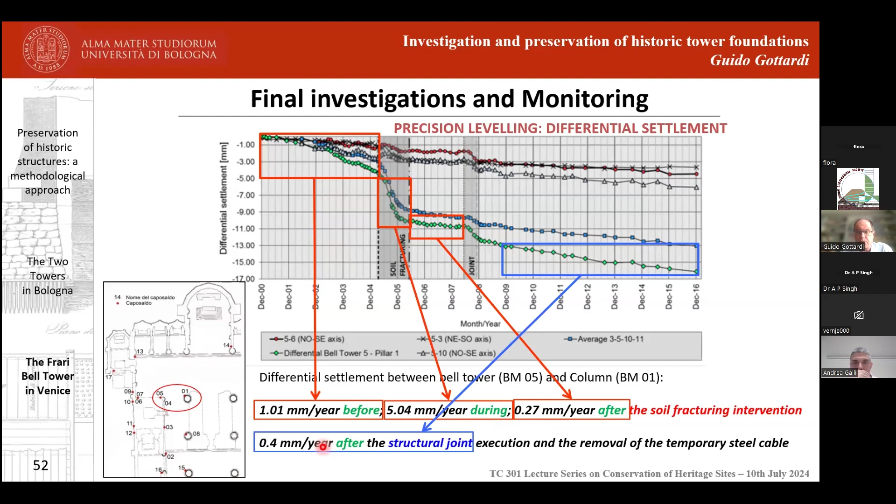So in the end, we can say from this case study, but in general, we have to stress the crucial role, as I hope to have shown you, of interdisciplinary investigations when we deal with this type of problem. So we have to go through history, architecture, materials, geology. Of course, geotechnical and structural engineering should be considered and can give their important contributions.

And then we have to try to think innovative criteria and methodologies to apply to the foundation and the structures, and thinking of a step-by-step intervention. In the case of the Frari Bell Tower, as in the Pisa Tower, the foundation material was fully preserved, and an articulated and extensive real-time monitoring system allowed us to calibrate and minimize the amount of intervention, which is, as we said at the beginning of the lecture, from the guidelines. A flexible technique was devised, enabling and adjusting further interventions if required.

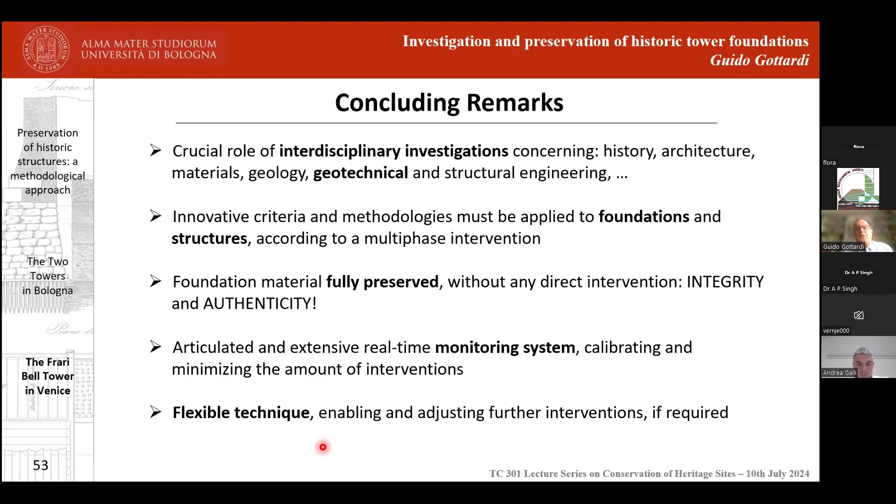Thank you very much, Guido, for your brilliant lecture, which I really appreciated, and it highlights the relevance of investigation and monitoring, because one of the key issues is that we do not know exactly how the structure is, what is there, and what are the safety factors. So you clearly demonstrated that. Now, Jitesh, please, the word is to you if there are any questions.

I think there is one already. Dear participants, if you have any questions, please unmute yourself and ask the speaker, Professor Guido. I think there is one written question: is a CPT and SPT results correlation made? I think they're asking what kind of correlations you used, I guess.